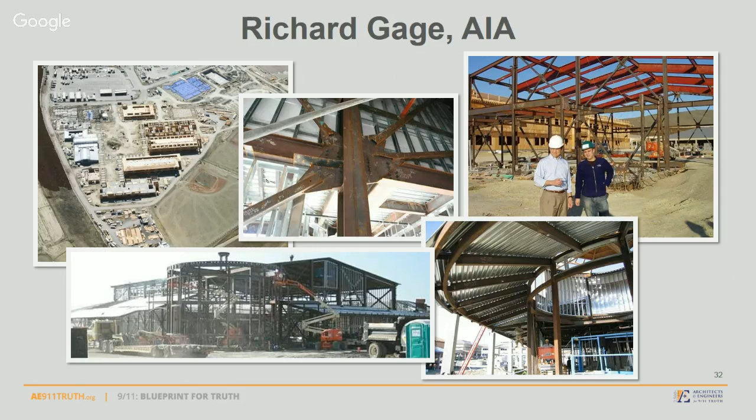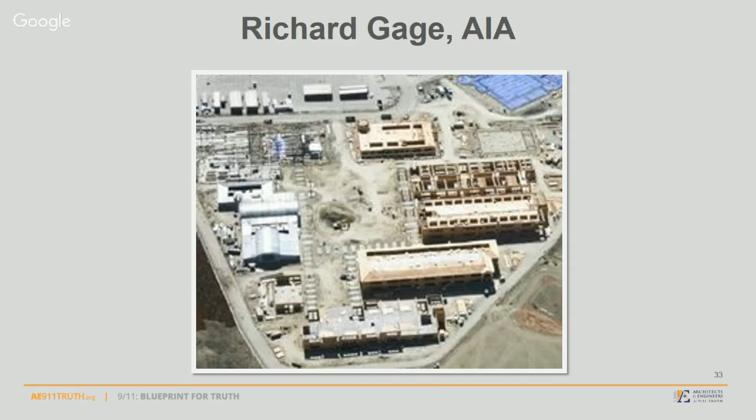I'm very excited. First, just so you know a little bit about me, I've worked on these $3 and $10 million gymnasiums in the San Francisco Bay Area as a project architect, doing the construction administration for them, and for the whole high school here, a brand new high school, $125 million high school. But more recently in Nevada, this 6-block long retail and mid-rise and parking structure, altogether about 1,200 tons of fireproof steel framing in this project.

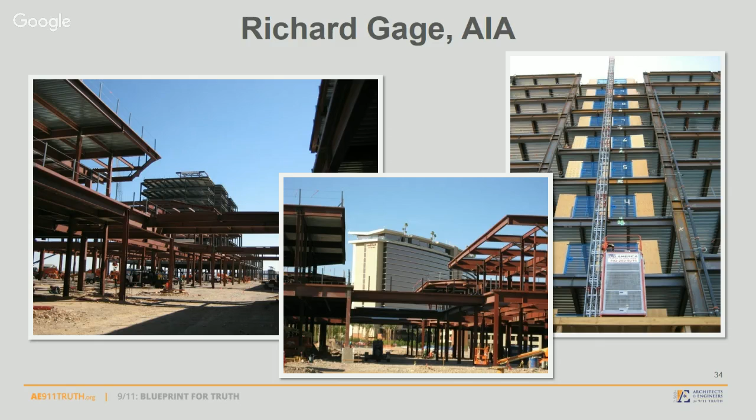But I've been devoting my time to Architects and Engineers for 9/11 Truth exclusively for the last 4 or 5 years, because we have got to get this information out. What information are we talking about? We're talking about the information that has alarmed more than 2,500 architects and engineers.

Now, since Philadelphia, we have about 2,700 architects and engineers calling for a new investigation, because we signed up 150 more architects at the convention. We had 8 volunteers, always, almost always, talking to architects. We were the most popular booth there. It was really quite a scene, and you can see this on our website, the results of that massive effort.

And this is the website. You can see resources in the store. You can see evidence, frequently asked questions, the videos of Building 7 coming down that we're going to be looking at today, as we look with a new set of eyes, the scientific method, objective eyes.

We've had this method for 100 years in the West. We have a question: how do the towers come down? Well, we formulate the question and do some research. How have other towers come down? We make some observations. We construct a hypothesis.

It's our best guess: I think the towers came down by office fires, or jet fuel, or maybe the plane impacts, maybe explosions, controlled demolition. We test all the rational hypotheses with experiments, analyze the results, and draw conclusions. If the hypothesis is corroborated, we report the results in an open, transparent manner, so all can build on the body of work that we do.

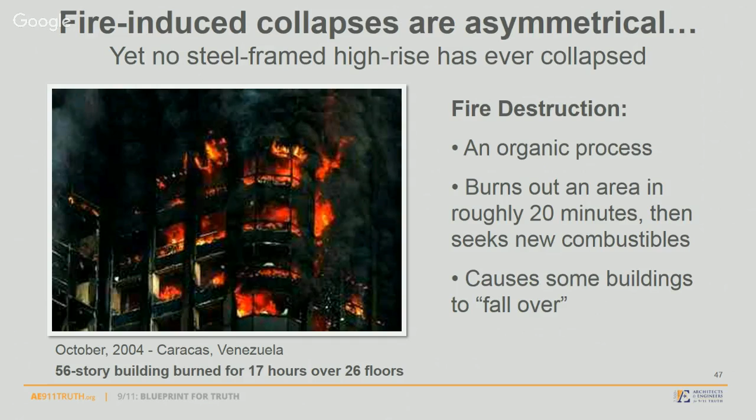In the case of a steel building, it's never happened before, as we'll see — the building would fall over. But let's look and see what steel buildings might do in a fire.

The way in which steel-framed buildings behave in fires depends on their construction. In this test, done by British Steel in 1995, a large amount of typical office furniture was burned to see what would happen to heavy steel beams that supported the ceiling.

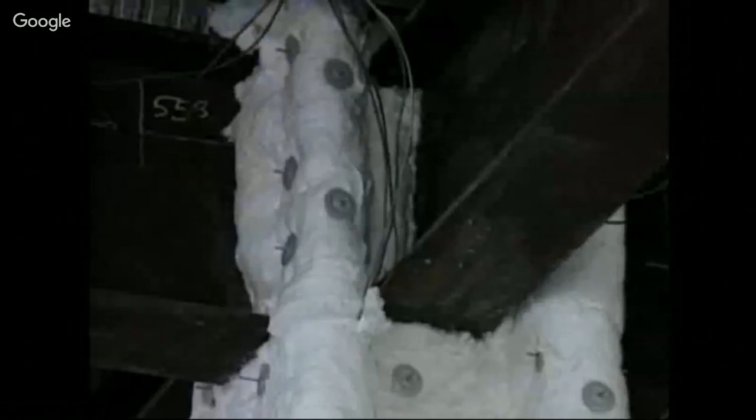When steel is bare, when it heats up, it gets weaker — it's not that it melts in a fire. In fact, normal fires are not hot enough to melt steel. Even if you were to use an unusual fuel like kerosene, you cannot achieve temperatures hot enough to melt steel. But what happens is it starts to lose its strength, and as it loses strength, it starts to sag. It becomes softer and sags and can no longer support the load.

This was the largest test of its kind ever conducted. It showed how unprotected steel can be distorted, even by a normal office fire. But as is typical in steel buildings, the structural beams only slowly and progressively warped and sagged — there was no chance of a sudden collapse.

In over 20 years, I have not seen until recently a protected steel structure that has collapsed in a fire. Until recently, of course, he's referring here, Jonathan Barnett, to the three skyscraper collapses on 9/11. And we're going to take a look at the third one today.

So this is very important — the third one, most architects and engineers know nothing about it. I didn't before I became aware of it through listening to a radio interview where I heard David Ray Griffin being interviewed, an author now of 10 books on the subject of what happened that day.

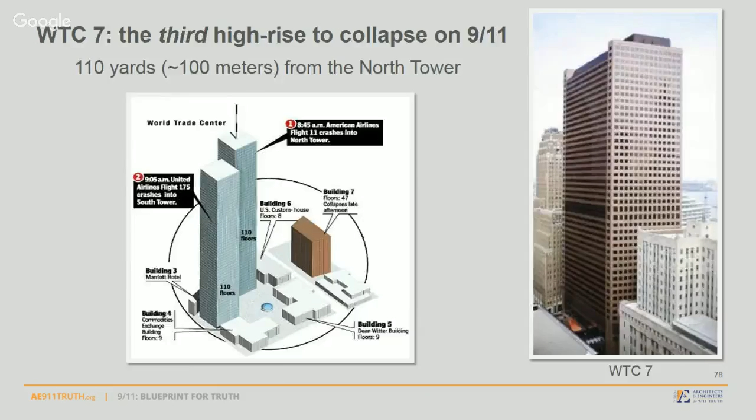And here it is, 350 feet or so from the North Tower, part of the World Trade Center complex. It stands even after the towers go down, as you see here, unmolested with the exception of some damage, which NIST says is an inconsequential factor in the building's collapse. So it didn't come down due to vibrations in the ground, or damage from steel beams hitting it, or diesel fuel fires, which was a common myth put out early on. But NIST has now dispelled those myths and claims this building came down due to normal building fires.

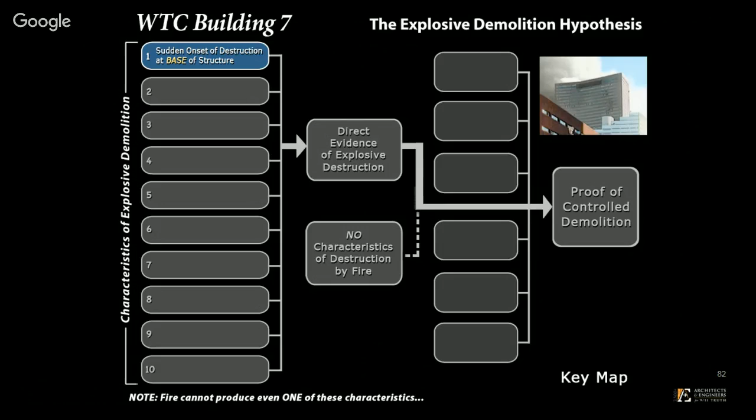Well, what we're going to do today is just check. We're going to look objectively at the hypothesis of explosive demolition. And last week we looked at many key features of controlled demolition. We've all seen this, like the old hotels in Las Vegas — we have a sudden onset of destruction at the base of the structure.

Well, let's see if that's true in this case, as we listen to Dan Rather narrate for us his first view of this building's collapse. And what you're seeing are high shots. Now here we're going to show you a videotape of the collapse itself — describe that. Now we go to videotape the collapse of this building.

It's amazing, incredible, pick your word. For the third time today, it's reminiscent of those pictures we've all seen too much on television before, when a building was deliberately destroyed by well-placed dynamite to knock it down.

Well, that's pretty important information. This is Dan's intuition that he's using here, which is helpful. We should all be thinking in terms of our existing frame of reference for seeing a building come down in 7 seconds symmetrically. This is what we've all seen, the old hotels in Las Vegas.

Problem is that Dan never repeated those words, and we have not seen on mainstream TV, except for maybe 3 or 4 occasions in the last 15 years, the third worst structural failure in modern history is relatively unseen by the public, unknown by the professionals in the building industry. And we think it's very important, so we're bringing it to your attention today. So thank you, Dan Rather.

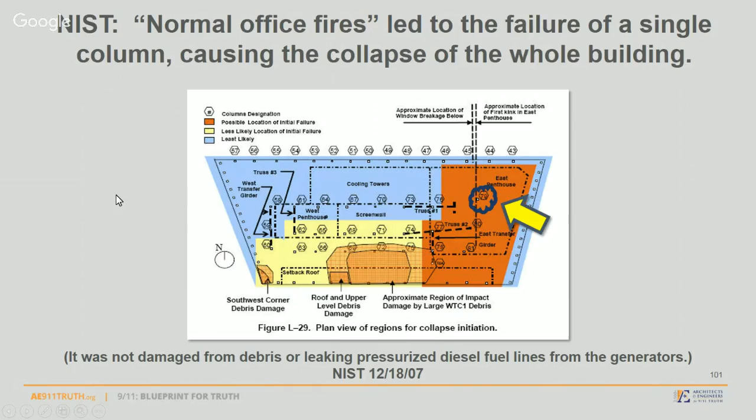Okay, so let's look and see what NIST is saying about this collapse or initiation of collapse. One, these long span steel beams heated up, pushing this girder off of its seat on this column, causing this floor 13 to fall on 12, 12, and 11, and so on, pancaking, leaving column 79 unbraced for 9 floors. When it buckles, causing the vertical collapse first, and then over a period of 10 seconds or so, a horizontal traveling collapse across this building, which we've already seen cannot possibly be true according to the videos.

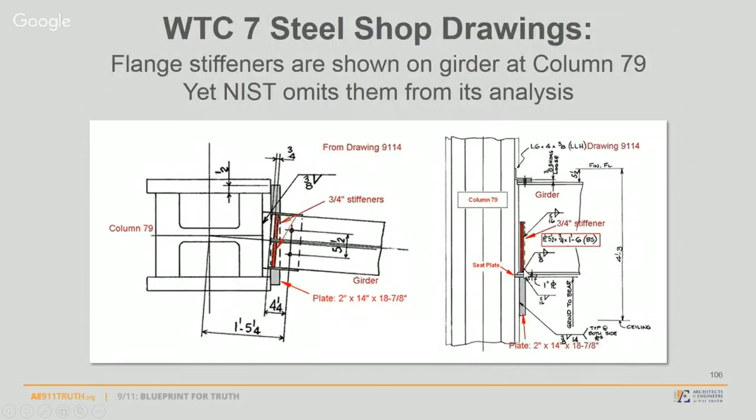...folded, because the web, the vertical member of this girder, went far enough just off the edge that the flange folded. But in order for that scenario to take place, they had to ignore the steel stiffeners in their computer models, which were clearly there in the shop drawings, as you see here. The shop drawings show these stiffeners. So that flange could never have folded, because these stiffeners keep it from doing exactly that. So NIST lied about this.

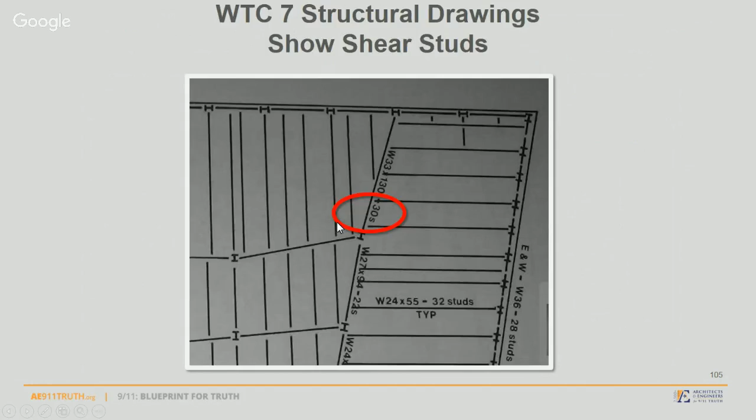They also lied about the existence of these shear studs on this girder. This is a lot of detail, but that's what we're doing in week 2. We're looking at the detail that proves NIST's theory, for about 10 reasons, could not even have happened.

For instance, let's just say that this girder did fall off this column. Well, there are 3 other girders very securely framed into that column, which would keep this floor intact even if this girder failed. So that could not possibly have happened, that floor 13 could even fall on floor 12.

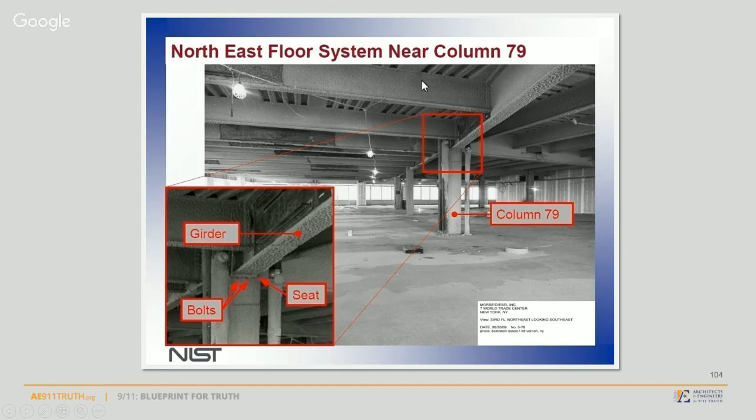But what do the videos show? None of that. A couple of windows breaking is all. And the computer model is stopped after 2 seconds. Why? They've spent 7 years creating it. They could show us what happens after 2 seconds, but no, it begins to tip over, showing no resemblance to the actual clean, vertical, symmetrical, free fall descent of this building.

So we certainly want an investigation into NIST themselves, not just the collapse of this building, because this computer model and their final report, which came out 7 years later - no wonder most architects and engineers know nothing about this building. Everybody had forgotten about it by the time the report came out.

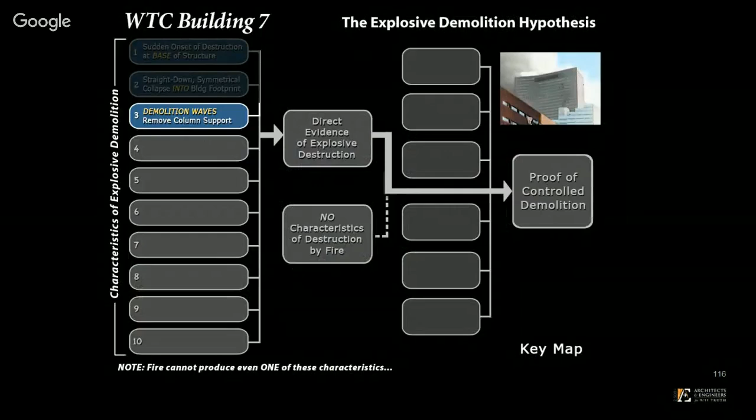Well, it does fall into its own footprint. Just about the center of the pile is in the center of the building footprint. So how do we bring a massive 47-story skyscraper down symmetrically? I mean, think about this.

The precision has to be perfect. All these columns, as you saw when this penthouse went down a half a second earlier, all these columns had to have been given up, removed at once, and then synchronistically timed floor by floor, because this building is falling straight down. And then also synchronistically, the perimeter columns need to be removed. Does fire, the official cause of this building's collapse, have that level of precision?

Most reasonable people do not think so. How fast is the building coming down? Well, feature 4 of the controlled demolition set of features shows that they come down pretty fast, often at free fall.

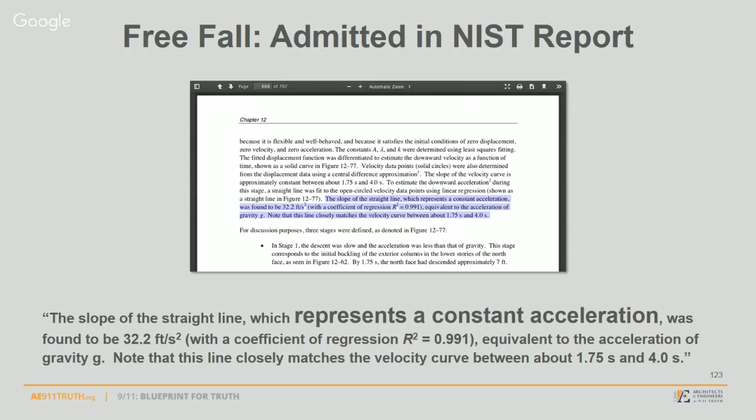In fact, NIST finally admits in their final report that this building did come down at free fall, after denying it for years, but they were confronted publicly by a member of AE911Truth, David Chandler, who said this is easily measurable - how can you just say that it came down shy of free fall? Well, they finally admit that a third of this building's 7-second fall was free fall, but they do not acknowledge the implications of that.

That those columns had to have been removed, or how that could have happened.

Do we have the total dismemberment of the steel structure? Completely dismembered, like a house of cards. This is a moment-resisting steel frame building, and actually part of it was braced frame as well. But the moment resisting is very, very rigidly welded column to beam connections.

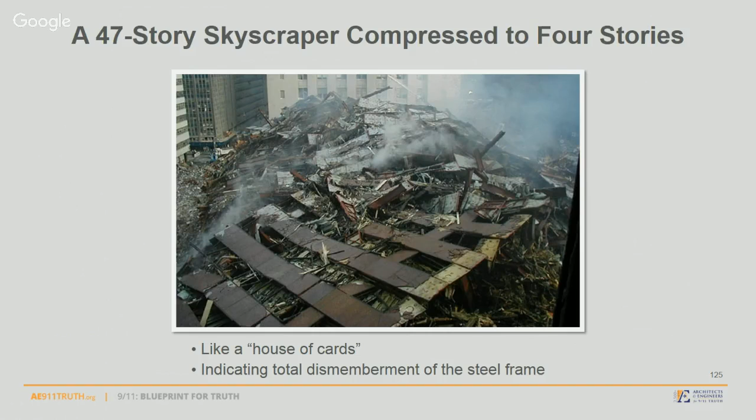So how does it fall in a pile 4 to 6 stories tall, 47 stories altogether? We should see a mangled building at the bottom, something like you see in these natural collapses, where the structural beams and columns are not completely dismembered from each other - we see what's left of a building. The concrete is not pulverized to a fine powder, which we'll get to.

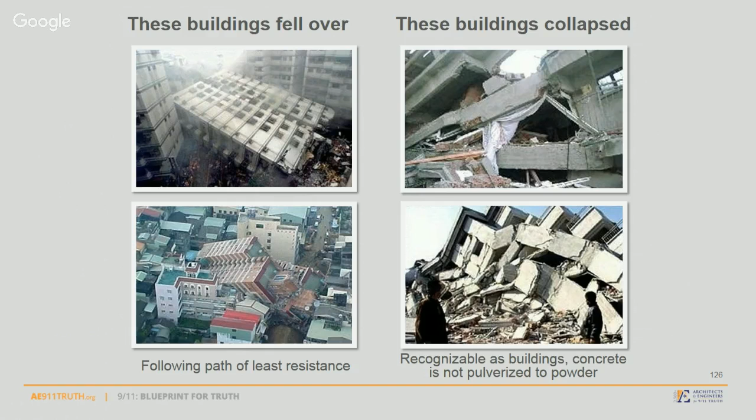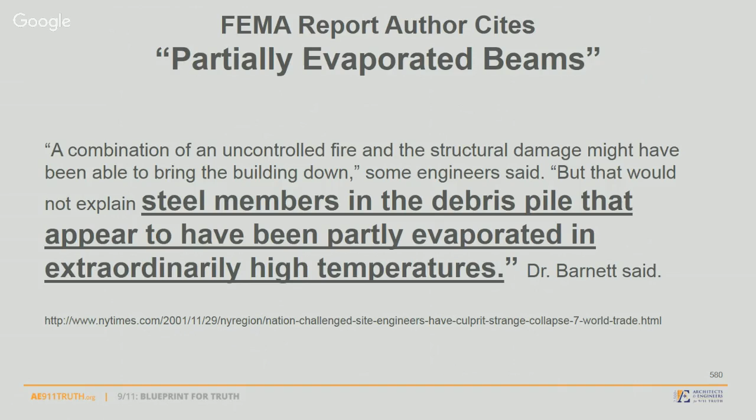But we've got more evidence this week as we look at the FEMA report from 2002, whose author, Jonathan Barnett, says steel members in the debris pile appeared to have been partly evaporated at extraordinarily high temperatures. He's saying this because first responders, firefighters, and structural engineers have never seen this kind of corrosion, a melting of steel. This is what he's talking about.

Evaporation requires 4,000 degree temperatures to evaporate steel. It only begins to melt at 2,800 degrees. Office fires are maybe 500 degrees. Some people claim 1,000 degrees. Even that is like three or four times short of the temperature required.

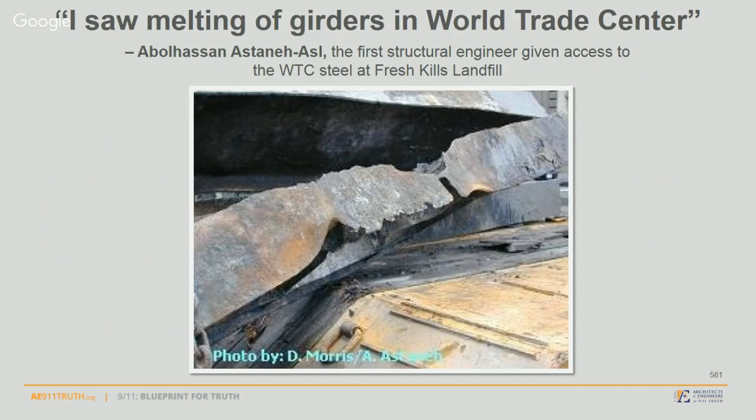To achieve the phenomena that's very adequately documented in Appendix C of the 2002 FEMA report, the metallurgical examination, a very good, careful examination which, by the way, NIST completely throws out of their final report when they took over this investigation.

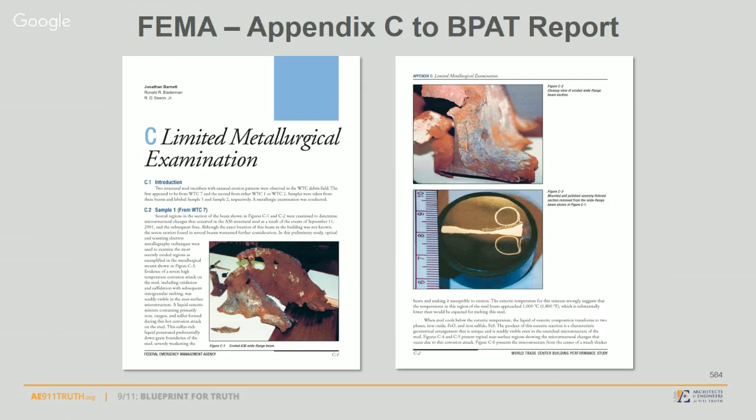After this report was released, we don't have Appendix C anymore. We don't have a metallurgical examination. We don't have the details that categorically show the presence of sulfur. Where does the sulfur come from? Well, it's a hot sulfur corrosion attack on the steel.

The New York Times calls it the deepest mystery uncovered in the investigation. Sulfur doesn't come from gypsum board—it's bonded calcium sulfate in gypsum board—and NIST or another speculator suggests maybe the sulfur came from the gypsum board. But gypsum board is used to protect steel. It's never turned around and attacked it in the 100-year history of using gypsum in various forms to protect steel structures.

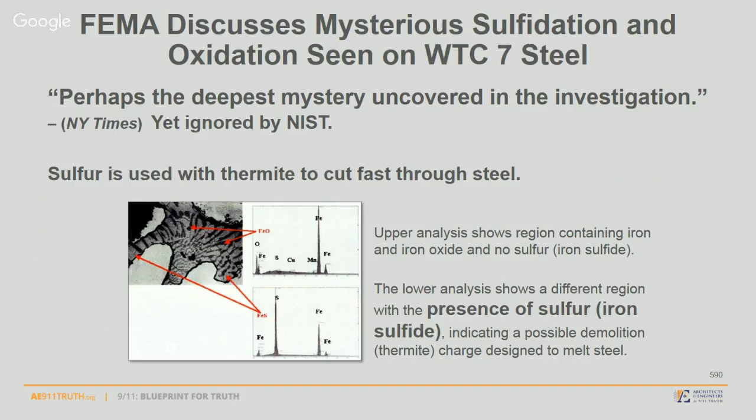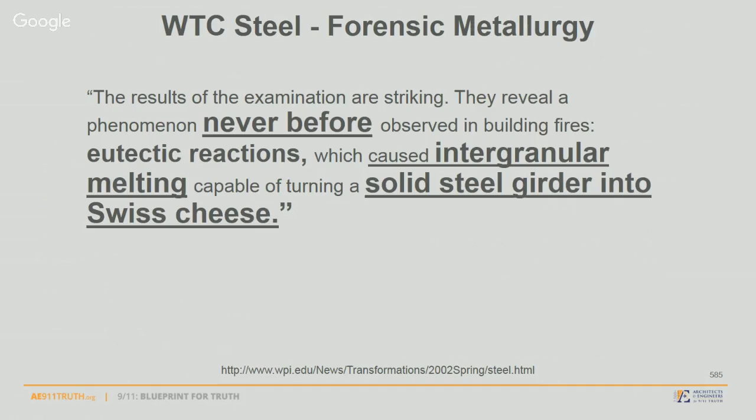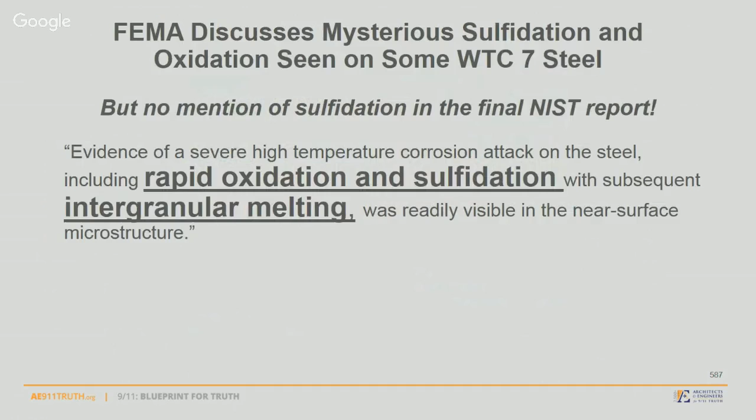Eutectic reactions are what's created with sulfur—intergranular melting capable of turning a solid steel girder into Swiss cheese, like this piece from World Trade Center 7. What can do this to steel? Rapid oxidation, sulfidation, intergranular melting, liquid iron.

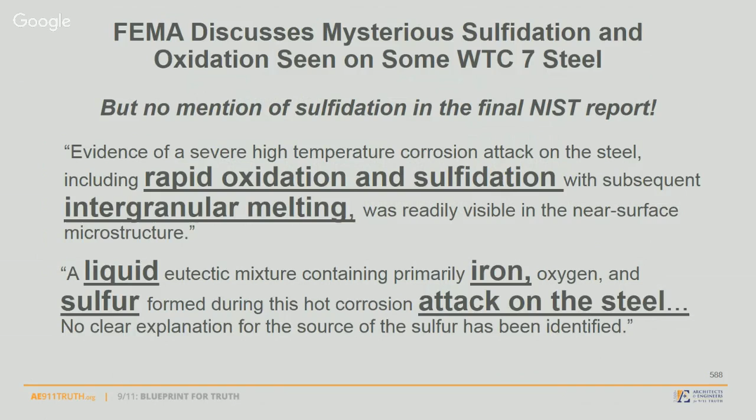Now, think about that. What is liquid iron? It's molten. We're talking about 2,800 degree temperatures. There's no source for the sulfur, save thermite, which is an incendiary used by the military to cut through steel like a hot knife through butter. We're going to look in detail at week 3, next Thursday, 1 p.m. Pacific, 3 p.m. Eastern, at the evidence of thermite and very high-tech forms of thermite.

So far, though, this is all direct evidence of explosive destruction or destruction with incendiaries. Fire cannot really create any one of these features, let alone all ten of them.

Even when they're not fireproofed, they don't collapse, as you saw in the test done in the UK in the previous video we looked at, in 1995, where unprotected steel beams merely sag. They do not collapse, fail, and certainly do not melt. Not even in China.

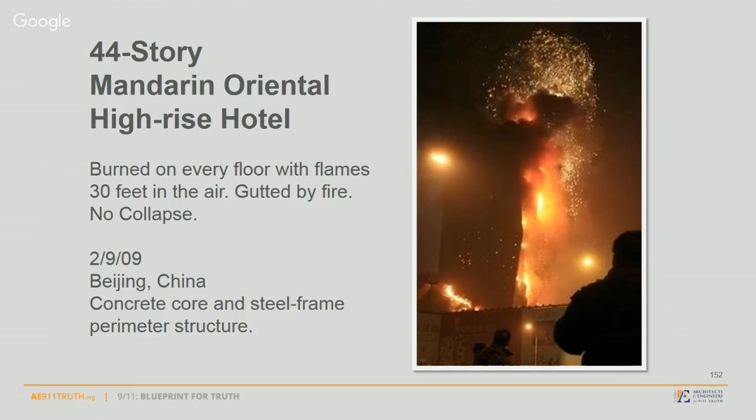2009, completely engulfed, top to bottom. Did it collapse? Well, fires like these, we'd expect it to come down.

What about FEMA and NIST reports? Well, there were investigations, starting in 2001 with the American Society of Civil Engineers. They were volunteers, but these volunteers worked their way through every one of these investigations, building reports into the FEMA report, which finally had some funding, $600,000, and then into the NIST report, which, as we said, came out 7 years later.

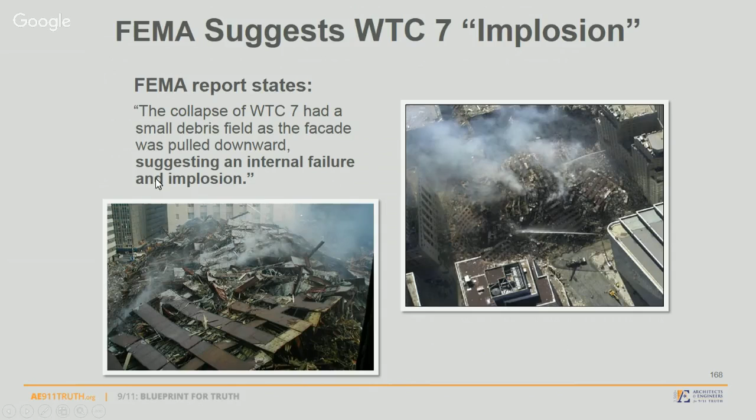Well, what does FEMA say when they came out with their early report suggesting an internal failure and implosion? Interesting.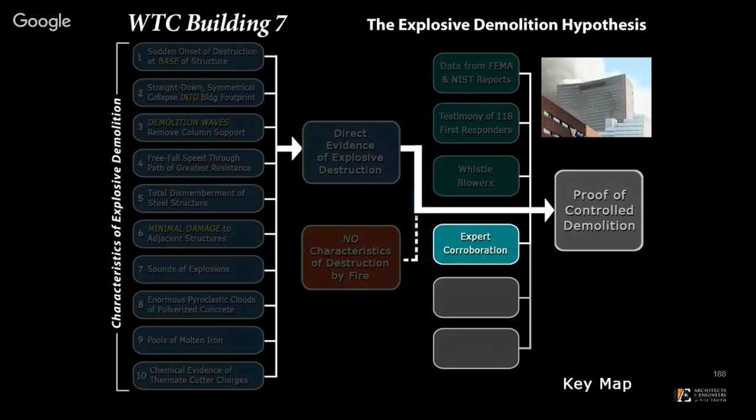We have a lot more to say about FEMA and the last week, the illegal destruction of evidence in a crime scene, where this material was removed from the scene of the crime within 2 weeks following 9/11 and shipped to China for recycling—99% of the steel—before investigators could look at it.

Let's look at some of the experts, like Hugo Bachmann, professor and chairman, Department of Structural Dynamics in Switzerland: 'In my opinion, Building 7 was with great probability professionally demolished.'

We have about 80 or 90 structural engineers signed on to our petition, calling upon Congress for a new, independent investigation, one that uses the scientific method relative to the evidence you've seen in this series of 4 webinars, one that brings forth witnesses, offers them immunity to testify under oath, all of which was not done in the earlier investigations.

Kamal Obeid, a structural engineer from California, says a local failure in a steel frame building like World Trade Center 7 cannot cause a catastrophic collapse like a house of cards without a simultaneous and patterned loss of several of its columns at key locations within the building.

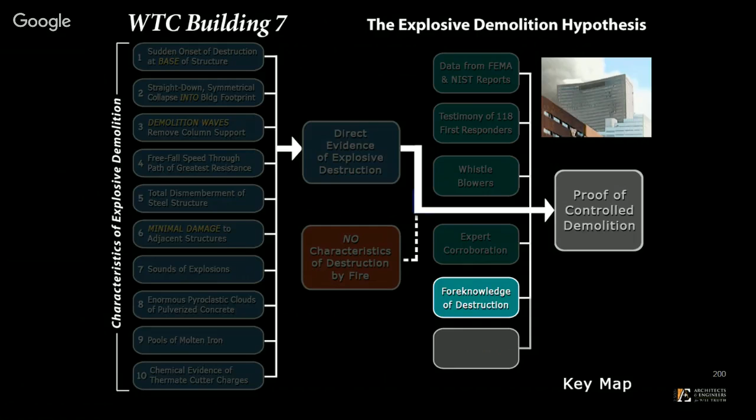Can fire do that? Did we have foreknowledge of the destruction of this building? It takes months, of course, to plan, engineer, and place explosives. Well, Nick Visconti—who we don't imagine is responsible for placing explosives—

Fire departments don't do that. But what does he say? 'We're moving the command post over this way, because the command post was in or around the outside of Building 7. That building's coming down.' So here he's announcing that the building's coming down.

And the firefighters were told not to fight the fire. These were a few small and scattered fires, and yet they weren't allowed to fight it because they were told it had structural damage. They're all expecting the building to come down.

And they told Indira Singh that Building 7 was going to come down, or was being brought down. Interesting—volition here; they're intending to bring it down. Did they actually use those words? And who was it that was telling you this? She says the fire department.

So this is very publicly available testimony. We're not making this stuff up, nor the police and construction workers walking away from Building 7, hearing an explosion over their shoulder, looking back at the building, and then looking straight into the CNN camera and saying this.

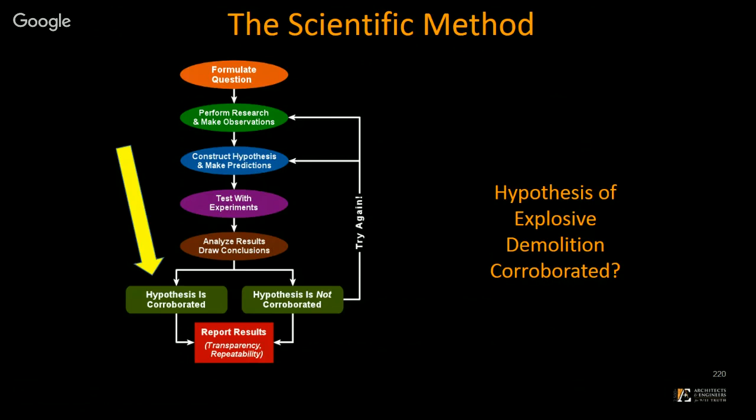With what we've been able to show in the 40 minutes we've had so far, we believe the hypothesis of explosive demolition is corroborated, and we want you to ask yourself: is there or is there not a need for an investigation? Have we this week shown the 8 key characteristic features of explosive destruction? Can fire create any one of those, let alone all 8?

And together with last week's evidence, we showed all 10 of them. Is there additional information available—corroboration, circumstantial evidence—that shows, together with the direct evidence, proof of controlled demolition to you?

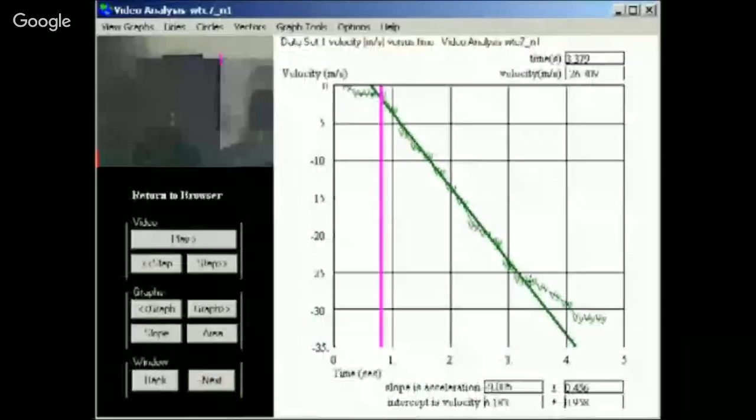More than 1,500 architects and engineers and 12,000 others, including many scientists, have signed the petition calling for a scientific investigation of the destruction of the Twin Towers and World Trade Center Building 7. The report issued by the National Institute of Standards and Technology, referred to as NIST, was not valid science. They're talking about a single columnar collapse or failure that resulted in a total collapse of the building. Building number 7 descended in free fall for the first 100 feet, meaning there was absolutely no resistance to the descent whatsoever—so all of the columns really needed to be severed at the same time. The symmetry is the smoking gun.

NIST has admitted it went into free fall for 8 stories. You don't need to be an engineer or an architect to see what happened to those buildings.

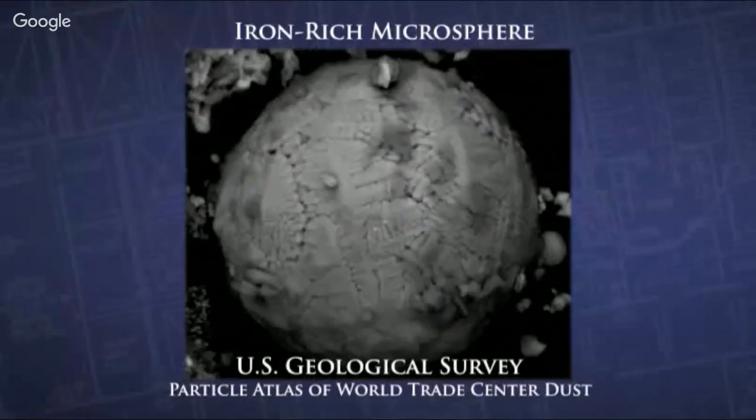In an office fire, you cannot generate enough heat to melt steel. There were these iron microspheres present in all of the dust samples. They needed to have been formed in extremely high temperatures. All the characteristics of the microspheres, along with what I see in the attack of the beams that were actually found, tell me that thermite was involved. In the dust, what we have found is a modern version of thermite, which we call nanothermite.

NIST concedes that they found no evidence for explosives. So then we asked them, well, did you look? And they said, no, we did not look for explosives or residues of explosives. And in fact, the evidence is overwhelming that these red-gray chips are very high-temperature incendiaries.

We have watched as scientific integrity has been undermined and scientific research politicized in an effort to advance predetermined ideological agendas. If this is a crime, I think everybody agrees it's a crime. Evidence was removed from the scene of the crime. You can't do science when you are deprived of the evidence and when your hypothesis is the least likely instead of the most likely. And the most likely hypothesis in the case of Building 7 wasn't even mentioned. This is not science.

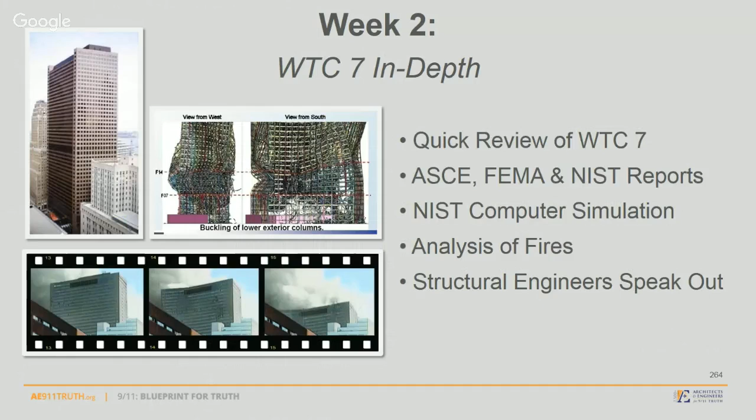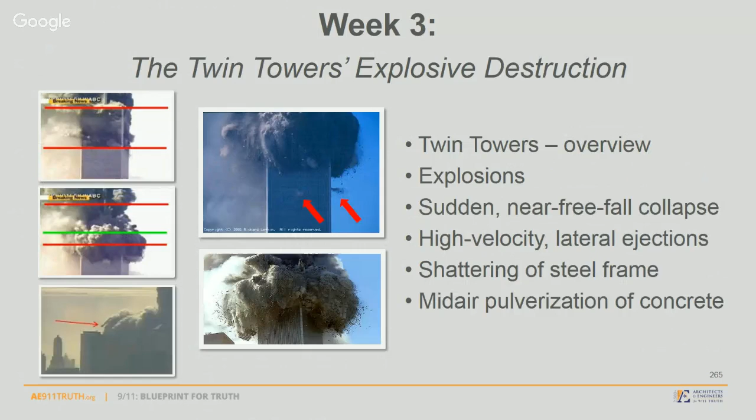Today was week 2. We looked at in-depth analysis of the NIST reports, their computer simulation, the fires. Next week, we start to look at the Twin Towers, explosive destruction. Week 4, we look at the extreme heat. Today, right now, we're going to see if we have any questions.